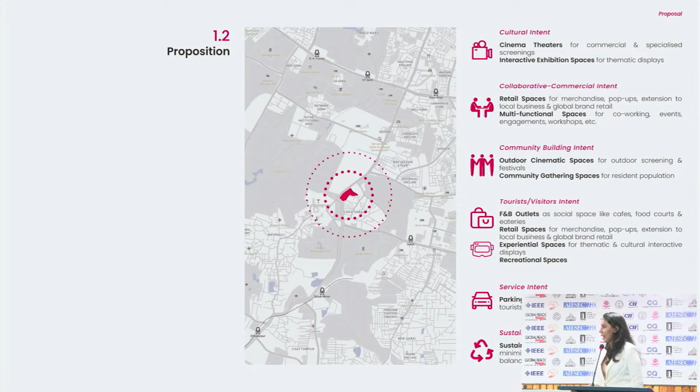The site, as you can see on the map of Delhi, is located in the South Delhi zone, right across the Qutub Minar precinct. The project proposition intends to achieve certain cultural, collaborative, and community-driven spaces which can bring people back into a holistic environment rather than have them segregated into their own personal zones, bringing people together for that culturally important tool.

Coming to the users, the user groups were derived based on interest, age, and the context of the site. Because of the cinematic quality of this project, it is something beyond age restrictions, something every age group, community, or person with a different interest may be able to enjoy. Based on context and demographic studies, there are a lot of generic public, students, working professionals, and industry-related professionals in the context of the site and in Delhi in general.

The program components for this project were to include auditoriums and premium auditoriums which could hold film screenings as a direct medium, but also specialized screenings or interactive exhibits around the cinematic industry, and exploration galleries where various exhibit processes can be brought to students or individuals who want to learn more about Indian or international cinema.

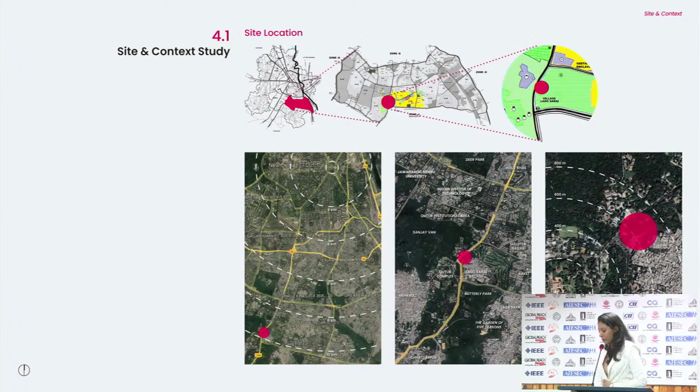The site, in Lado Sarai, is a 7.86 acre site, approximately 31,800 square meters, located about 10 kilometers from central Delhi. These are some of the landmarks understood to gauge the demographic or user groups that will access the site daily, and why this site becomes relevant or prominent for such a project.

The site is right across the Qutub Minar precinct, and the entire Mehrauli Archaeological Park and rest of the historical monuments make it relevant because they experience daily tourist and visitor footfall. Even modern cultural landmarks within a 3-kilometer radius are relevant because they are famous among different user groups, which could impact the footfall experienced on the site.

Institutional landmarks also have relevance because with the increasing knowledge about media studies, cinematic studies, arts and culture being taught in various institutions, youngsters or curious minds could access the site to gain more knowledge about cinema and not feel secluded. Delhi has not experienced such an entertainment hub in totality.

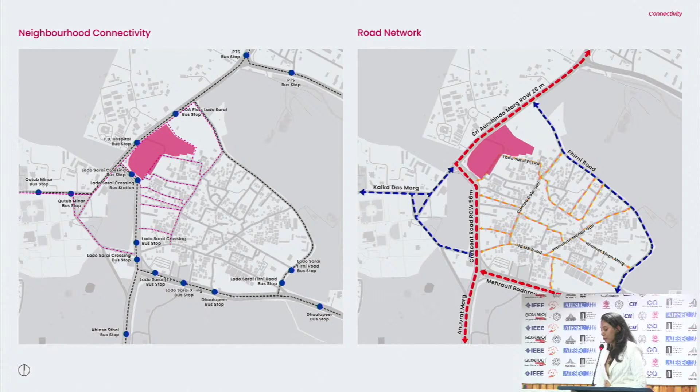So these mark the various connectivity and access points, which highlights that the site is very well accessible by public transport, pedestrians, etc. Now onto the design thinking.

The project vision was to create an iconic cinematic icon, an iconic site at a city level, a heritage oasis as a community catalyst at a site level, so that it can cater to the tourists on a daily basis, the people who are living, as well as the people who are living within the vicinity or accessing the site and its surroundings for work.

The major concept driving the site and its design is the visual connectivity and access leading to the Qutub Minar. That drives how the built would respond on the site, and how primarily the open spaces are targeted and the built spaces are considered around it.

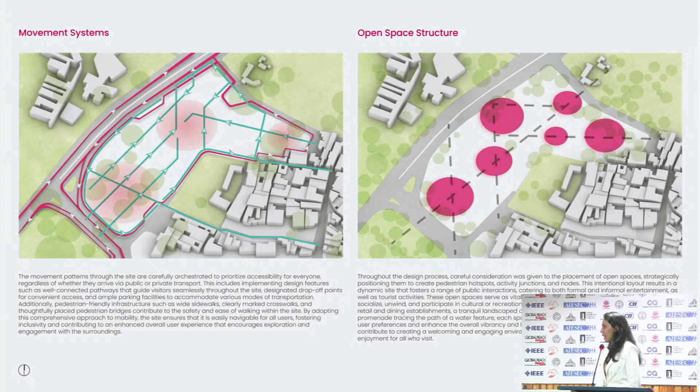These movement spaces and open space structure arrive from various understanding of the traffic movement, site connectivity, accessibility of public and private transport, as well as pedestrians from the neighboring houses. It also aims to have a green integration, considering the contours on the site, as well as the green environment around it, with Sanjay Van and the Qutub Golf Course adjacent to it.

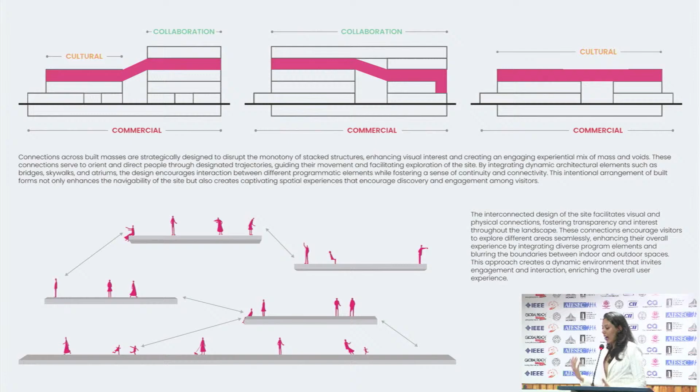The intent, because of the existence of a lot of contours on site, makes it relevant to have multi-level connections, so people are not just restricted to one linear phase or one zone. They're able to access various parts of the site and have an experience of the entire site as a whole.

Now coming back to the multi-story, the fact that it is called multi-story with a Y is because there are various stories, like in a cinema, happening at various levels as well. It's the promenade at the basic urban level, at the site level, which is bringing people in, which is attracting as well as creating public spaces.

The performances where various art forms, screening, cinema-related activities may happen, and the folly, which creates a green and a more sustainable kind of roof environment, also gauging on the views that it offers.

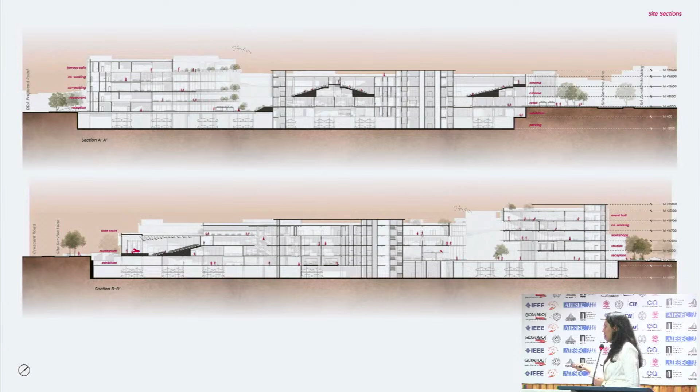Through this, you can see that this is the central promenade, bifurcated at 2 levels. With various programs placed intermixed at various levels, it gauges a direct view or a direct visual vista towards the Qutub Minar.

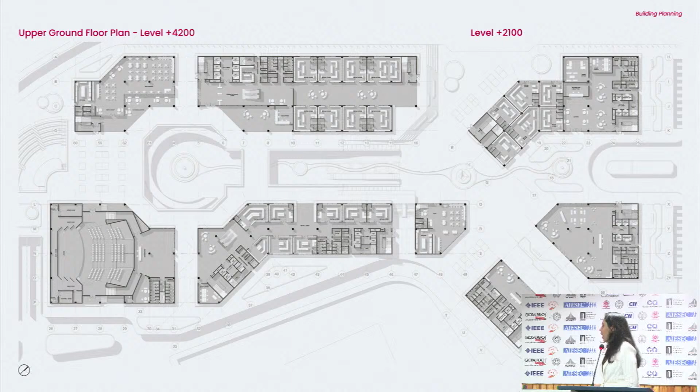These are the various floor plans. The ground floor plan basically is the entire exhibition gallery. The upper ground floor plans, as you see, there are multiple levels extending and moving up and down, which are designed as per the contours of the site, keeping the contours and the natural topography of the site in mind. These are majorly dedicated to commercial spaces.

Then the first floor plan is for the cinematic spaces, and this entire chunk is for office spaces or workplace zones and co-working.

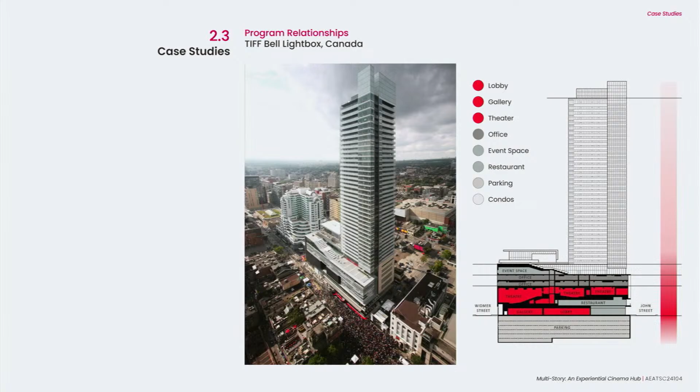So to answer that question, that's why I have created the concept of a promenade at the lower level, so it doesn't necessarily restrict you to interior cinematic spaces. It also brings you out in the open, like the plaza spaces or the open air theater spaces that have been created.

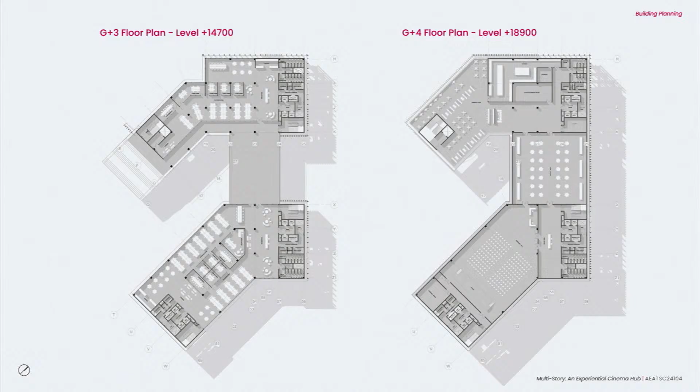So I wasn't actually following what you were saying. Do you have something, or did I miss it out? Yes.

So basically this is the central vista which looks towards the Qutub Minar. The intent of this was also, since Qutub Minar as a historical event has significance with the site, with the context, as well as has had significance with the cinematic history in India also.

It's being used as an iconic tool, an image, or it has an identity always connected with Delhi when it's projected or to gauge audiences. So that is a kind of experience that this promenade also offers while you are in the space, whichever space you may be able to enter from.

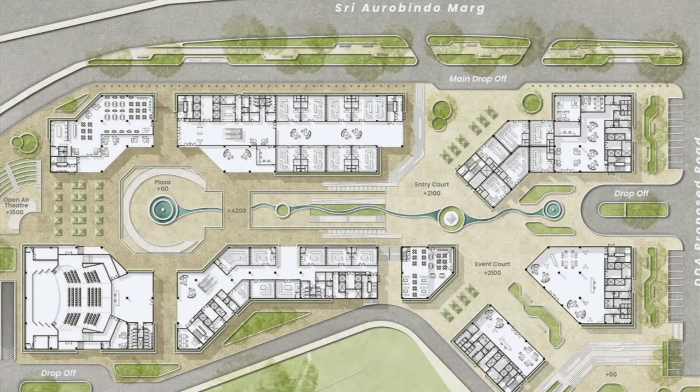If you're getting dropped off, if you're accessing the site as a regular working individual, or here to learn about experiences, or just to experience various art forms taking place in different public zones, this basically blurs the boundaries. It does not have strict limits to allow one person and not another. It creates a central space where every kind of community member is able to access, as well as gauge the kind of experience that this promenade has to offer between the built structure, focusing on, you can see it, and I can actually access that auditorium.

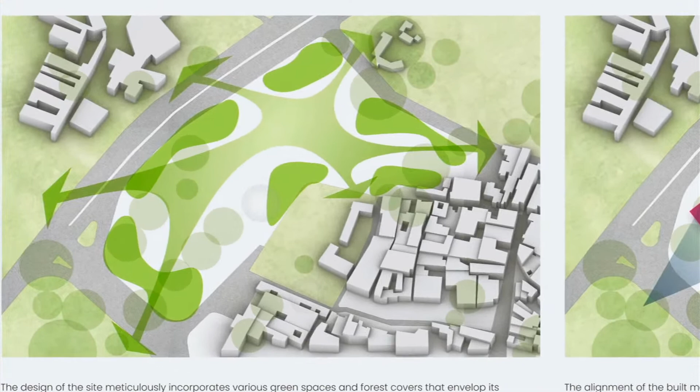Basically, this has fine lines which highlight the contours, but maybe because of the lighting, it's not properly visible, which is why I had demarcated on the site plan which are the level differences taking place. Okay, fine, thank you.

Can we come to the site plan? Yes. So your central vista is reminding me of Lutyens' Delhi and not of the Qutub complex.

But anyways, what I want to ask is, considering this as a social concern that you're trying to show here, if I'm looking at this, the Aurobindo Marg, which is a very strong edge, you cannot expect people from across to participate physically also. You're trying to create some views towards the Qutub complex, which I doubt is possible. But anyways, the little gesture you're trying to do in terms of how you're trying to open up that area for the people from Lado Sarai to come and participate - the structure is so alien to them, so intimidating in its character, do you really think people from Lado Sarai will come and play a little part in that community center you've attached there?

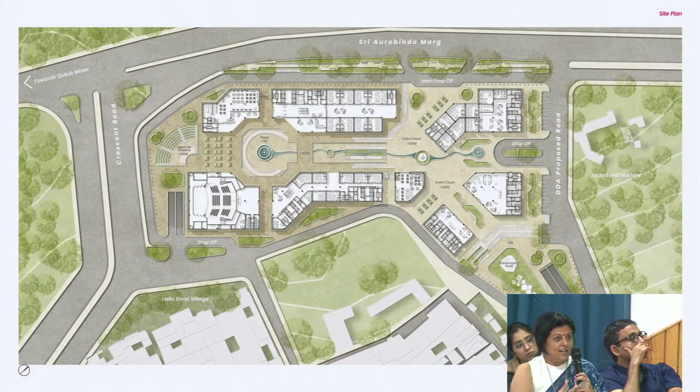And also, why a cinema experience? It's currently an empty DDA land which is not being used, so to revitalize that and give people spaces, because there has been no development on the site for a very long time - it's being used as a dumpster. So to improve the lives of the people living there, they're actually able to use the site and not just have it used as empty land.

Also to generate more productivity and more people to be able to use the site, maybe it be students or industry professionals related to the cinema industry, or generic people who want to learn about cinema - cinematic exhibitions are put up, and those are something that come up very rarely in a Delhi context. People run the art gallery, so in a way, financially it is helping them. But again, this question - even if you have these professionals or experts of cinema coming here, how is it helping the people around, meaning the people staying in Lado Sarai or across the road in Mehrauli? So definitely to generate more revenue or more productivity on a site which is right now a total dumpster.

That's why I started with cinema as a tool, because cinema halls, even though having lost a little bit of significance, are growing back - that is what the consensus also says. So this is something that people of all age groups, all interest backgrounds would like to access. If it was just only a singular gallery or something like that, which is only of interest to a very small group of people, versus cinema, which was taken up to be able to gauge the interest of more people from various backgrounds - even people accessing the site as workers, or who have offices, or who've just come for commercial or merchandise related experiences - they're also able to interact with the facade, the site level public spaces, and be a part of the public arena.

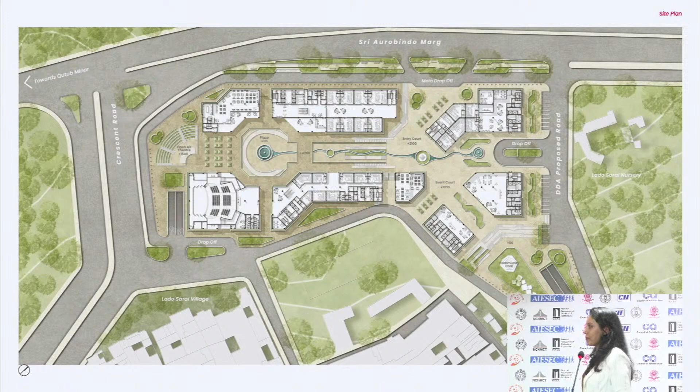I wanted to commend you on your narrative, the way you put your presentation together. But I also have to pull you up on the fact that when you attend a seminar like this, you should have done your homework and ensured that you cram it into 15 minutes. Yes. All right, all the good work went to waste, right?

Having said that, at least from two sides of the road, there is no distinctive entry point. And I think if you had done that, your idea of keeping this as an open access would have sufficed. Right now, I see this as a ubiquitous design, which means everything everywhere, right?

So it's a limitation. The second thing I wanted to indicate here - you talked about it as a promenade, right? I don't think you have got the word promenade right for this, because go to your section, please, of that particular promenade area, and it is not a promenade.

Look at the height of the buildings on either adjoining sides. It is more like a court, a central court, and not a promenade. So if you wanted to create a promenade, it would have meant that you needed to work on the idea of stepping out your section, ensuring that the visibility of a promenade is more defined. It would have made a lot more sense if you had a promenade going there.

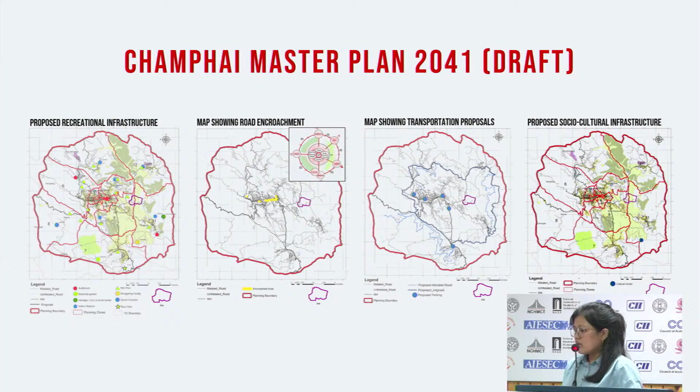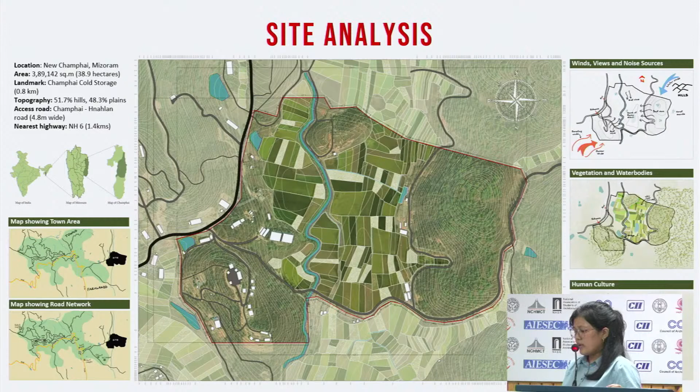hills and 50 plains. And towards the east and the west, we have two hills, and then there is a wet rice cultivation flowing in between where construction is not allowed.

And for my site zoning, I have divided the site into 3 zones according to culture. The east side being the Chin area, and the west side the Zo, and towards the north the Kuki people, which I have said before as the geographical location for my concept.

And then they will each have 3 cultural towers, which we will see later, and it will also be pedestrian friendly and cycling friendly. And towards the right we can see the contour maps.

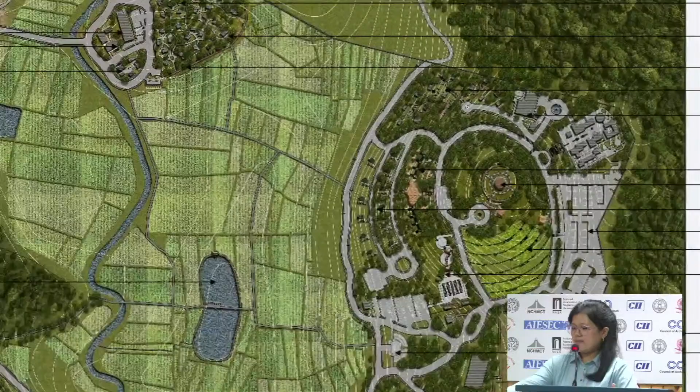So this is what the site plan would be looking like. I have taken the evolution map that we have seen before as a development for my site plan, where it will be starting with this area, and here there will be the from the Chiang people, how they came into Mizoram. So here there will be the Chin people coming down.

And then the houses will be there, Chin houses, and Chin tourist village will be there, and Oak Tasar plantation, and here, this will be where they start their evolution from, and they will move further down here, and then the weavers will be here, as we have said in the map before, and there will be the river, the border river that flows in between.

And after they cross that is the Zo area here. And the Kuki area, the Manipur area, will be here, where they have mainly bamboo construction and bamboo firms there.

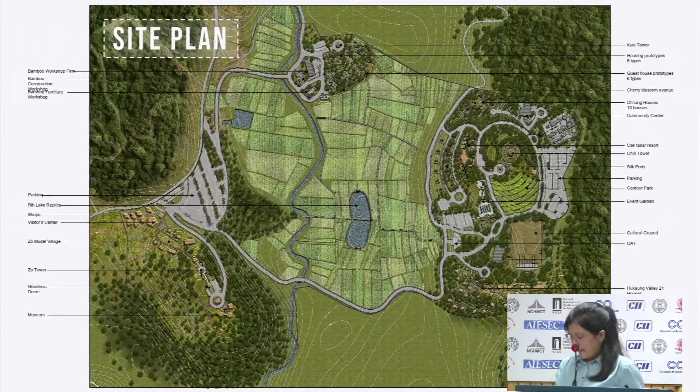So first, let's talk about the Chin Tower, which will be in the Myanmar area. It has structural supports like threads, and inside that holds up the tower, and the staircase like a strap woven around it. I also placed it in Myanmar area to indicate the birthplace of weaving culture.

And we can also see the 4 colors of the walkways, which I have taken as reference from the natural dyes like indigo, turmeric, and all. The second one is the Kuki Tower, which will be giving tribute to the art of craftsmanship and artistry, and it's also to denote the shared heritage in Kabaw Valley with our ancestors.

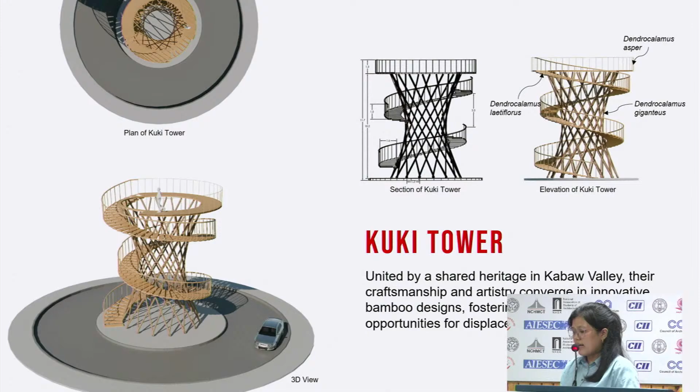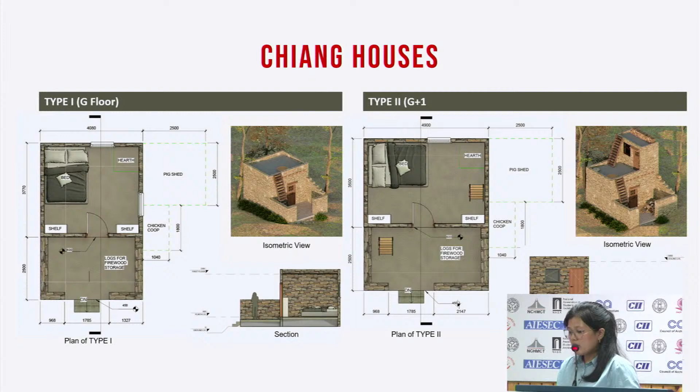So this is the Chin area. The first, the Chiang houses where the first ancestors were living, which is made of stone. And this is the Chiang tourist village, which is mainly a recreational area, and its areas will be used. This is the silk pod stay.

There are two reasons why I called it Silk Pod Stay. One is the revival in textile production, and another is because the Oak Tasar plantation is there. The frames will be made of CLT wood, and the membranes inside will be made of ferrocement or some pneumatic inflatable structures. The site showcases woven fabrics, textiles, furniture, all displayed inside.

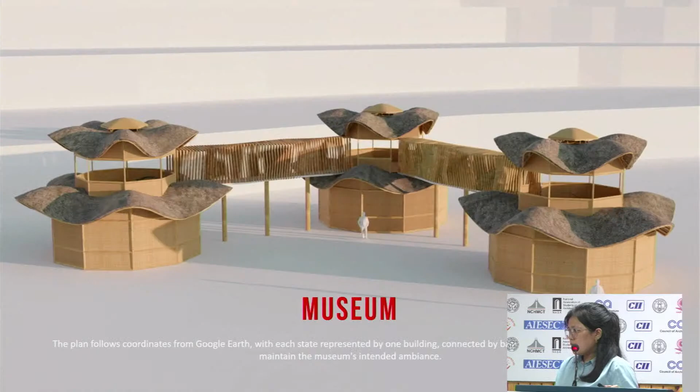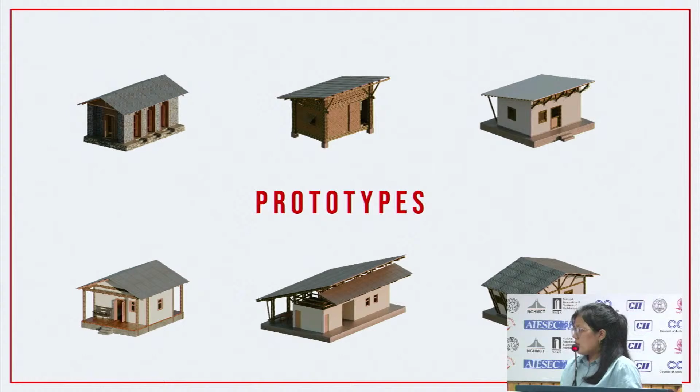I have also created prototypes because recently we faced the cyclone Remal, which cost us about 30 lives in our place, and also the collapse of around hundreds of houses. So this is the reason why I have come up with the housing.

Prototype 1 is a stone-filled gabion wall house, where the walls will be made of gabion stones to resist lateral pressures. At daytime it will be used as a bamboo craft center, and at night it will be for family housing.

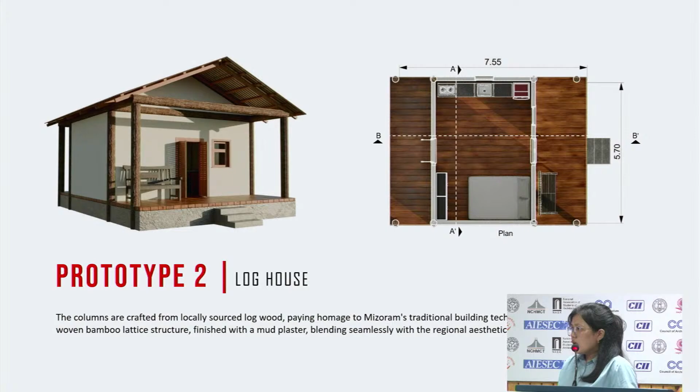Also, the roof will be of Tetra Pak roofing, made of aluminum foil and recycled polyethylene. Number 2 is a log house, the traditional one we have in our place. The columns will be made of oak, teak, and sal, and the rafters will also be made of wood.

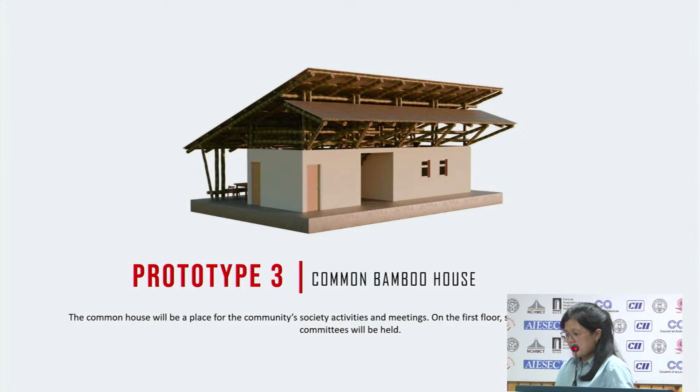This one is the common bamboo house where the local village head or the regional head will be staying, and the upper floors are divided into two. The right side is used for crafting and the left side will be used for drying.

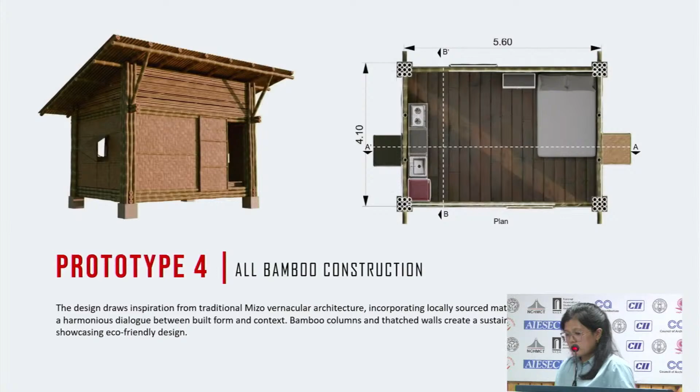Number 4 is an all bamboo construction. The only thing I have changed here, since it's a cultural thing we have, is that I have used a greater number of columns. So this will be the elevation sections.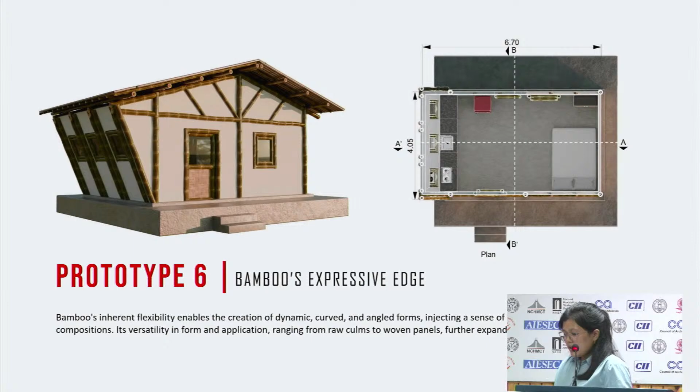And this is the last one, bamboo's expressive edge. I have made this to show how bamboo can be used in our place, which is an earthquake-prone area, and also to reduce the floor space and increase the utility of the space vertically. And that's it. Thank you.

Congratulations. So what I wanted to ask is, our vernacular architecture, in its essence, is very sensitive to the climate, to the material, to the construction technology. And that has evolved over a period of time.

That's missing, sir. You're not very clear about telling us whether it is just that one independent site or are you handling it over 3 sites?

Sir, the reason I chose this site is because I wanted a river flowing in between, so that made my site bigger than originally planned. I've indicated here where the towers will be placed, the red ones, and where each.

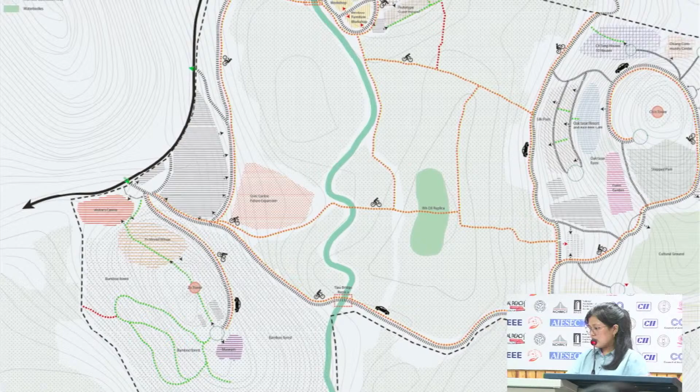From here we can see how the cultural spatial division will be, and how the communities will be taking care of the business models and existing vegetation strategies. From the hydrology map and slope analysis map, I placed the blocks inside. My project was quite big, so I was trying to cram it into 15 minutes, otherwise I would have more time to explain.

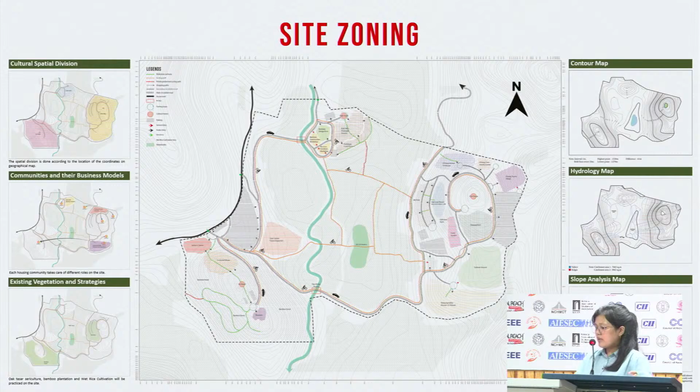If you look at the museum circulation, we can see it from this section, and this is the floor plans. There won't be physical, tangible models, but there will be writings and art galleries, objects like that sitting on the floor won't be placed there.

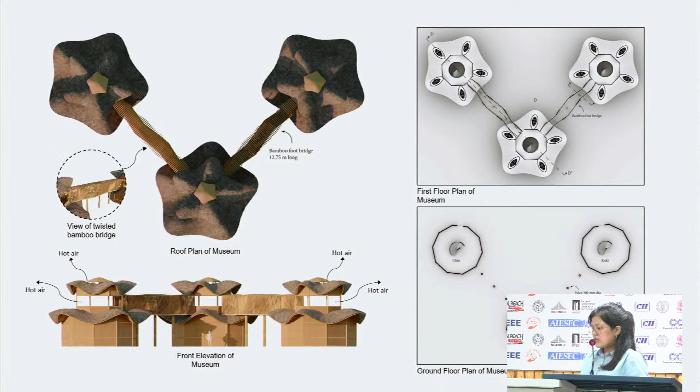Congratulations for making it here. Thank you, ma'am.

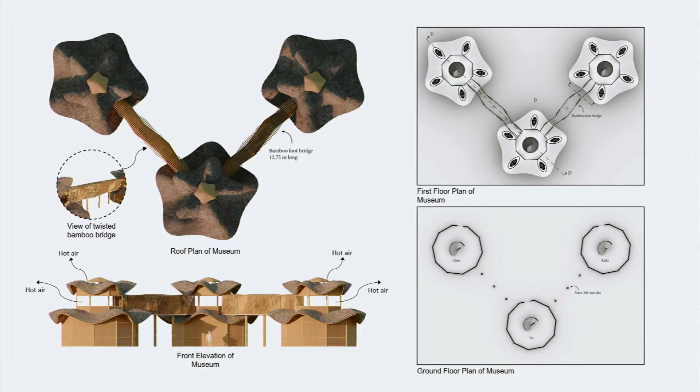So my question is, we are talking about employment as well, right? I think there were two things you were trying to say. One is loom and weaving, the other is farming.

So in the design, I am not able to see where these spaces are. If we are doing loom, there is probably a certain process to it, right? So these processes.

Ma'am, usually in this site there's a water body where fishes are kept. There is a wet rice cultivation where this fish-rice-duck integrated system is going on, and there is azolla farming also. It's totally natural, with no use of fertilizers.

The fishes, I forgot the word, aerate or something, give oxygen to the rice cultivation. So the farmers cultivate ducks and fishes to take care of the farmlands also. In our culture we don't usually have cattle farming or anything like that.

And for the weaving, ma'am, where do you accommodate that process? Ma'am, this area, the Hukaung Valley, 21 houses will be for the weaving.

In our culture, almost all the women in each family were historically experienced in weaving. So in each house there is a balcony that rises up, and there they had their weaving looms. That is where they place it.

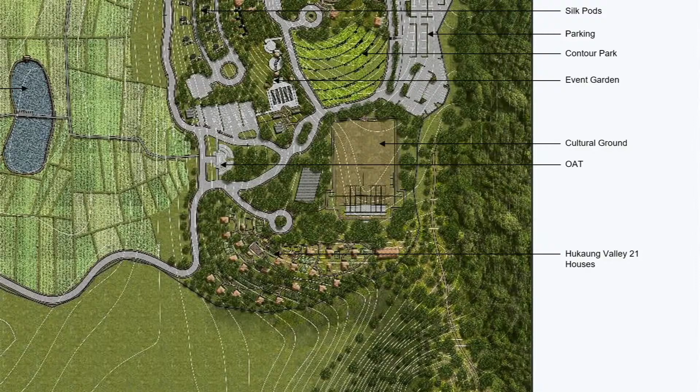But ma'am, unfortunately I couldn't keep the drawing, it's in my AutoCAD version, I didn't render it in this one. So, okay, thank you, ma'am.

Thank you. Thank you.

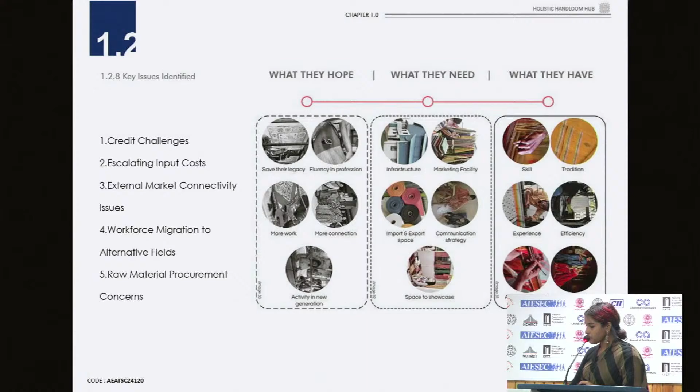What are the aims and objectives? My project has 3 E's: environment, equity and economy. It aims to target these 3 E's. My aim is to create a single hub for the weavers in Shantipur with multiple objectives, including preventing exploitation, generating employment and connecting with the fashion industry by promoting collaboration amongst locals, government officials, visitors and other stakeholders.

The scope includes connectivity, and important parts like different dyeing maths around the site, and the Hooghly River village. I studied how the dyeing is done and how the squares are formed organically. My site, being a very important aspect in the rural setting, plays a very important role.

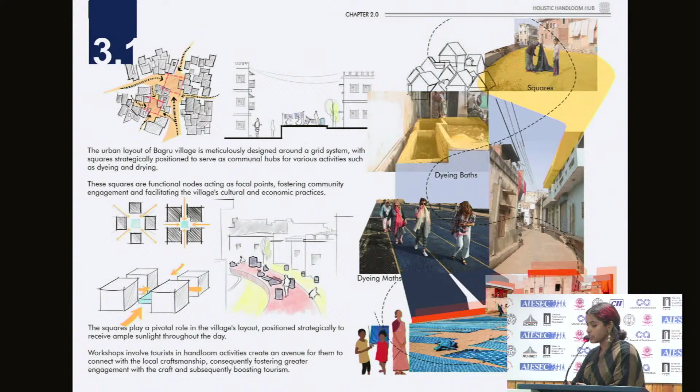That's why I studied Bagru. And here, I have studied the networking of the entire site plan, how it's done, how the natural spaces are integrated.

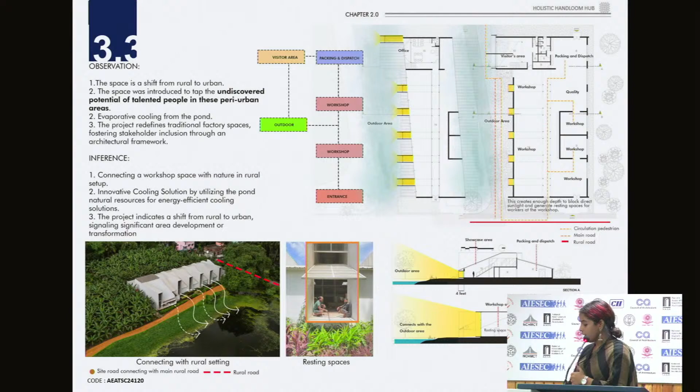This case study is very small, but it plays an important role because the workshop spaces are connected in a very unique way with the rural setting. My site also gives a similar vibe. So studying this helped me understand how the undiscovered potential of talented people in this peri-urban area can be utilized through natural openings.

It's connected with the Sealdah junction in West Bengal, the Shantipur junction, and then to the Motigaj More. I'll go through the site study since we have a little time. In this landform area, there's a slope running to the southern part, and a lot of water bodies and vegetation around my site. I've identified all the plants, and my design aims to keep the vegetation of that area intact.

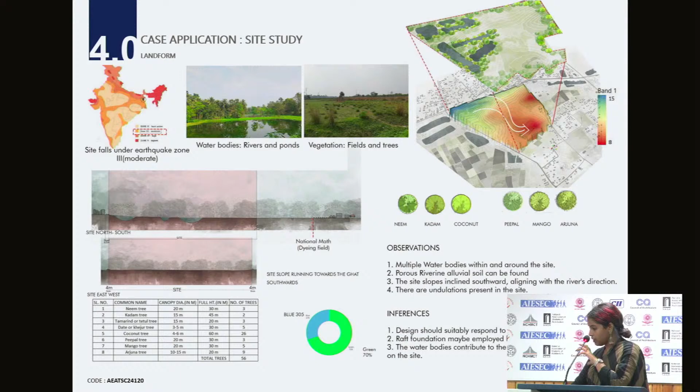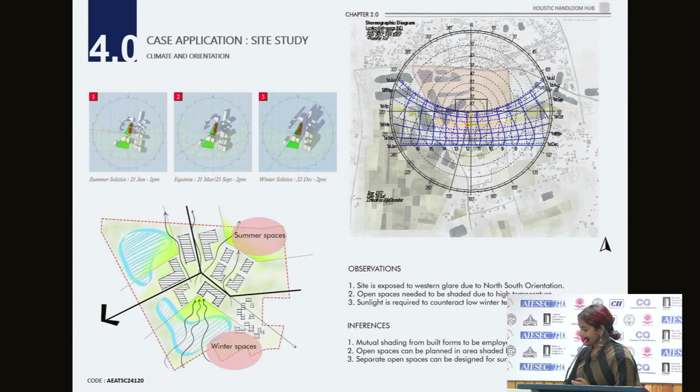So mutual shading from the built form can be employed to reduce glare. This is the urban pattern, the granular pattern of the site around there. The lower strip shows the neighborhood area of the site, which has a very vibrant character with a rural setting.

The first photo shows the present condition of the site at Shantipur, and then I have connected it. I've taken the two major axes, the diagonal axis and the north-south axis. I haven't changed any character of the site, and I've tried to orient my built form accordingly.

So I've integrated nature with community and tried to highlight Shantipur's handloom tradition by connecting a roof structure. My site also shows the handlooms through a central axis which celebrates the weaver, and it has major points where it weaves with the nature.

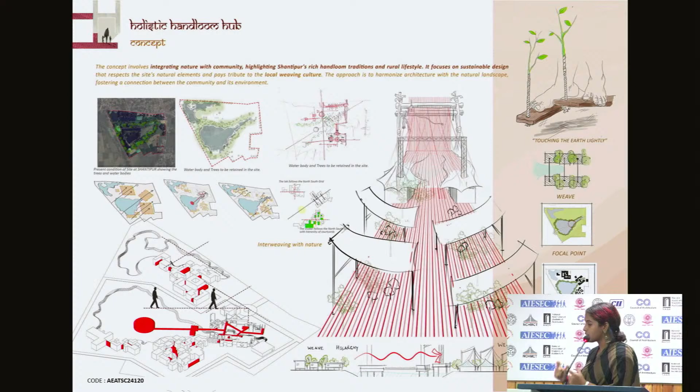It has a major focal point where the two axes meet, a hierarchy of spaces, and also a framing of vistas done in the site. These are the primary development sketches I went through for understanding how to integrate the handloom and the sari within the built form of my project.

The site zonation mainly consists of four important blocks. One is the lab, in the upper portion, the lab and the library. Then there's the central axis which connects with the ramp to the water body, and it celebrates the weaver community, with the exhibition space, the experiential center, and the workshop areas.

Then comes the cluster block. It was initially thought of as a module which can be implemented later to the weaver villages, and they can relate to the cluster block, with that module implemented later to the different weaver villages around. Then there's a dyeing block along the water body, as water is a very essential part of the dyeing unit. So I've tried to connect the dyeing block with the water body that was already present.

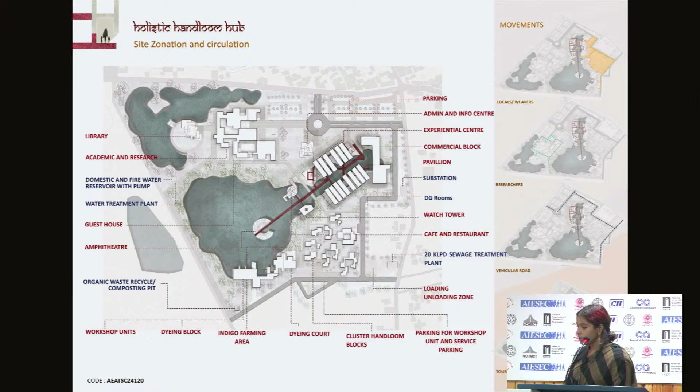So this is the site plan. The initial stretch of the block, the commercial block, that is the diagonal block, is connected with the admin. This is the entrance, this is the admin, and over here is the private space, this is the lab, which only people can go and explore if they want to see how the dyeing, how the research is done. This is the admin, this is the commercial block.

Over here is the gallery, the experiential center, and the office spaces below, and it connects with the workshop areas. This creates a visual connection and a horizontal connection. So when a tourist or any person comes, to make them interested in the entire process of handloom, I've tried to create a journey through this entire block.

And then it connects with a ramp to the amphitheater, where fashion shows can take place, creating a very important fashion show venue.

So designers can go and do their fashion shows over there. And then this is the cluster part of the block, which is connected towards the weavers village, already there in this part of the site. And then there's a dyeing block over here, so people can come and experience the entire dyeing process also, through exhibitions and all.

In this block I would like to explain in detail. So this is the exhibition and gallery part. I have tried to follow the hierarchy of spaces through the courtyard spaces over here. And this is for the lab block, because it's very important for natural light and natural air to come in while the entire experiments are done.

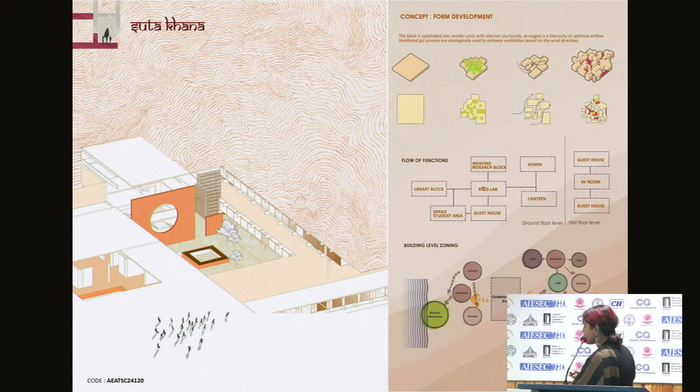And here I have tried to create a very rural kind of architectural style with jalis over there for ventilation, so that it connects with the people working over there. This is the lab block render, and this is how the entire space will be inside the lab block.

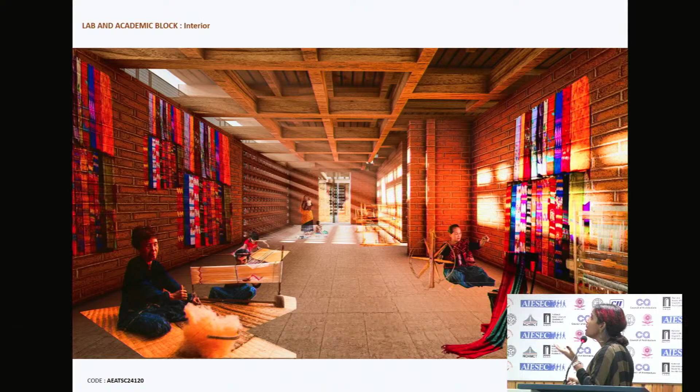I wanted the light to come in, because as I had a talk with them, they said they don't want something marvelous, an out of the world architecture building. They want something they can relate to. So my entire idea was to make buildings which architecturally uphold the space, but yet give that essence of rural setting.

So this is the basic render of the dyeing block.

It has taken shape. Can we go to the master plan, please? So this is...

I have to appreciate the grand narrative you went through, because it covered most of the ideas that went into the project. Having said that, some of your drawings are not very clear. For example, the site plan itself is not very clear, doesn't indicate which parts are built versus what is open. Can we go to a much clearer plan which indicates some parts of your project?

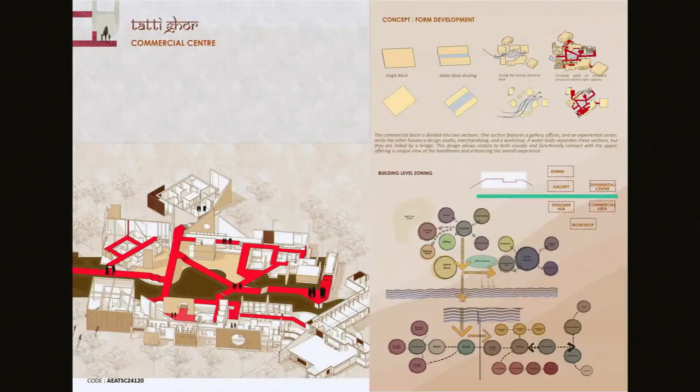So let's leave it at this. The idea is that your work...

The rural character of that space creates a unique identity, but still it's rural, and a weaver can connect with it. I have done a survey with the weavers on all their points, like the amount of light they need, where they need it, and how they need it. I went through that, and accordingly designed the cluster blocks and lab blocks. The main focus of my project is this diagonal axis I have been talking about, which celebrates the weaver community. They will be walking in places comfortable to them, but yet look up to something that inspires them. So this axis plays a very important role in inspiring the weavers, as it celebrates the community.

You've not answered my question. My question is how vernacular have you gone through? Have you built out of RCC, steel and aluminium?

No, I have just... so let's answer that question. Yes, so answer the question, exactly.

I have worked on exposed brick patterns, and I haven't used RCC columns. For the modular structure also, I have used bamboo stilts and bamboo structures.

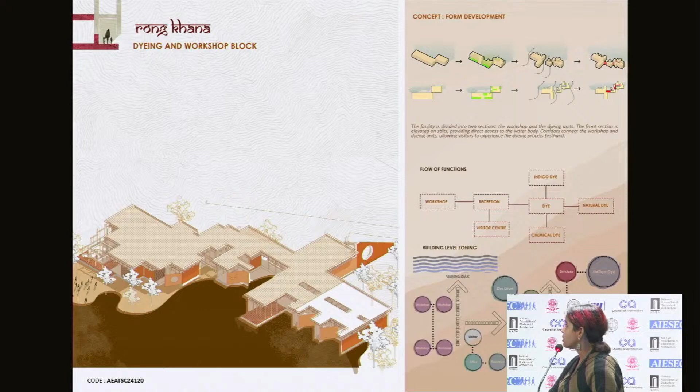Okay, I can go through the modular structure. The jalis and all I have used over here.

So this is one of the modules I have worked on, and it has a timber beam and column structure with stilted bamboo strips for ventilation.

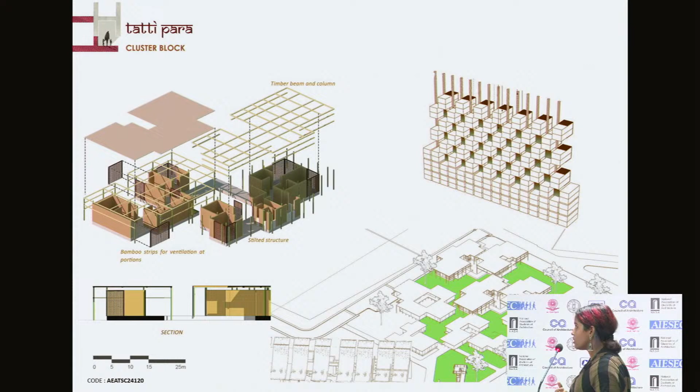I wanted to create a modular structure which connects with the neighbors. Thanks.

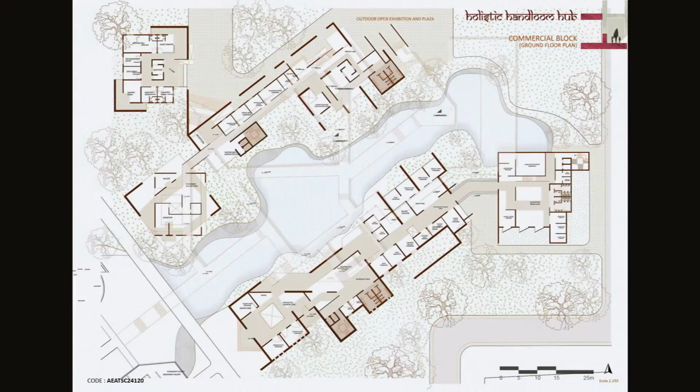Congratulations. Thank you. My question is that this making of fabric would go through various stages and various processes. Yes, ma'am. And probably each process would need to be placed accordingly, and the amount of rain that is there. So how do you justify that?

Yes ma'am, so only this portion of the building has an open structure. In part of it there are galleries and all, but I have kept a light kind of jali in the roof structure, and over there I have overlaid the clothing kind of framed structures.

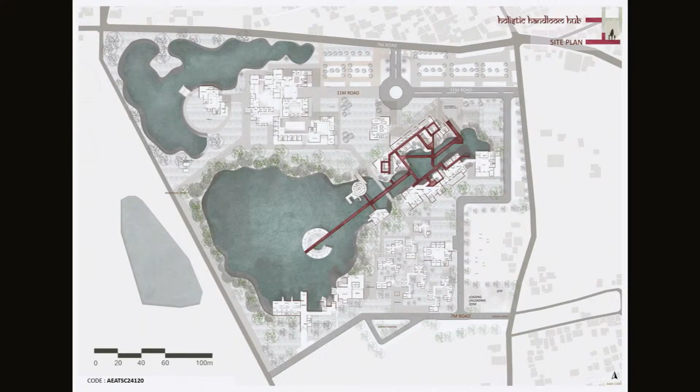The entire thought was to connect the clothes, and so that different... yes ma'am, three have a different size of footprints. Yes ma'am, the articulation is different.

Even the scale is different, right? So it doesn't appear to me, if I'm looking at it, as one entire whole. So my question is, why do you need this, and when you're breaking it, if there is a change, there has to be some kind of connectivity.

An element that defines that change, which is not there. So I see a very loose-ended approach. Yes ma'am, they can go to that area. So even if they are supposed to go to that area, what I'm trying to say is that 1, 2, and 3, they need to connect somewhere or some place.

Ma'am, architecturally, through the identity of the space altogether, I would say that yes, somewhere it's connected because of the materials, the exposed brick, the open planning and jalis, and the stilted bamboo material that I've used. Overall, if I view the place in that way, it's connected. Thank you.

The last presentation of the day is AEATSC 24103, Urban and Cultural Hub at Sabarmati, Ahmedabad.

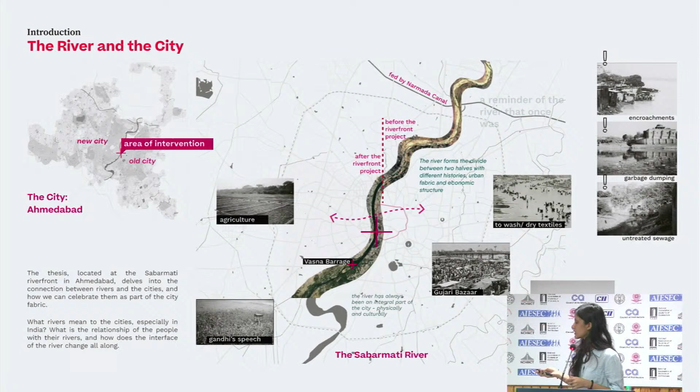So my site is located right in the center, like the heart of the city, on the juncture of the river, the old city, and the new city on the other side of the river. Ahmedabad as a city was established around 600 years ago, and it's divided by the Sabarmati river, which is a monsoon-fed river.

In recent times, the riverfront opened around 2012, the first of India's riverfront development initiatives. So the site, at the center of the city and at the riverfront, holds huge potential to unlock those lost charms from the old city and to revive the urban environment.

As a starting point, I delved into studying how the river was and what it actually meant to the city, and how it transformed from washing clothes at the ghats, to holding circuses, to having a 600-year-old Gujari Bazaar that happens to be right at the place when the river was dried up, taking place at the flood plains, which is reclaimed land.

I identified various issues that happened due to it being the first kind of project in India, to understand how urban rivers could be treated and how we could propose a way to reconnect the rivers back to the cities.

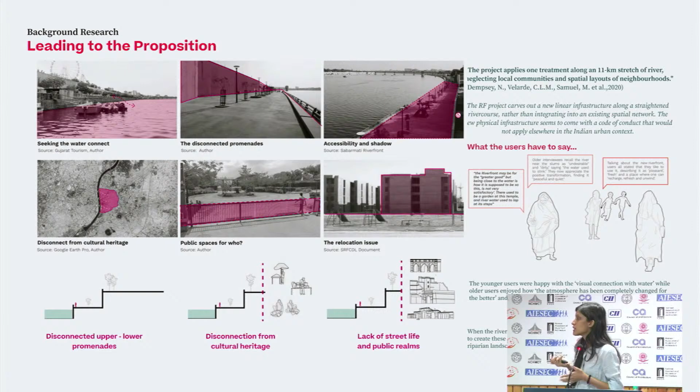The problem being that people are seeking the water connect, the disconnected upper and lower promenades, the disconnection from cultural heritage. So these were the pointers represented in this scheme.

So my approach involved the big scale, the informal and the formal, which allows the smallest units and the least powerful workers to operate alongside the largest units and the most powerful economic players. This was the kind of approach that I focused on.

I had a few case studies since the site's program was to be a cultural center, so I researched exhibition and cultural centers.

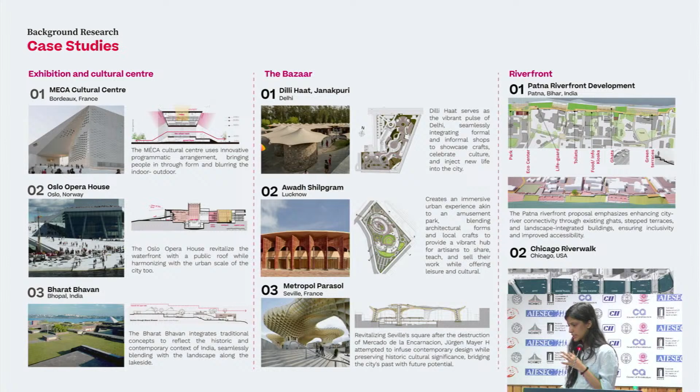The bazaar is a very important aspect of the project because of the presence of Gujari Bazaar right in the vicinity, and the riverfront's highlighted area is the newly allocated area for the Gujari Bazaar that used to happen across the river. So it is placed right here, opposite to the site, across.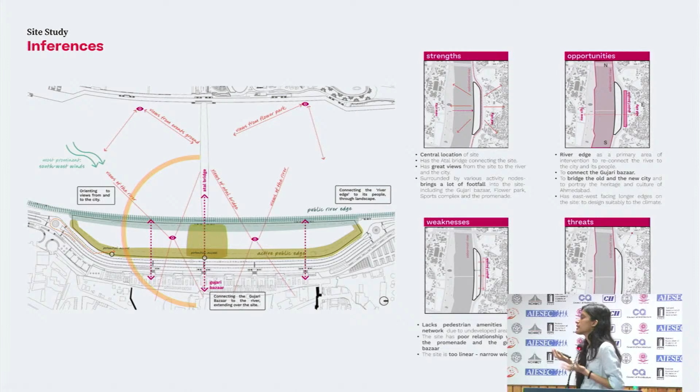So my intent, through the site study, the research, and the context study, was a few pointers: as I said earlier, to establish a connection between the old city and the new city through this pathway, to bring the bazaar to the riverfront, and to activate the riverfront to be full of the representation of the public life of Ahmedabad, showing local art, various artists' exhibits, outdoor exhibitions, open-air theatres, the riverfront plaza, food courts and workshops.

So this was the further program analysis.

And the design determinants were bringing the city closer to the water, activating the site using green spaces and public life, and creating the people, and that itself is the exhibit.

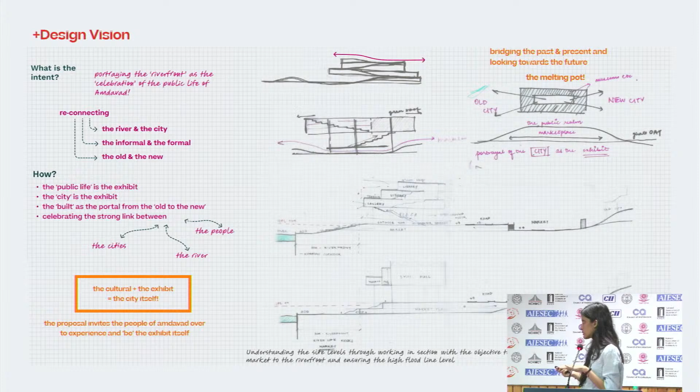So these are a few concept sketches where there's a play of levels to interact with the river, as well as the built-up relationship, and to bring the Gujari Bazaar here, which is at the riverfront level, at a +7 level, considering the river to be at 0-0 because of the high flood line level, which has only occurred twice.

So the concept revolves around making an urban traverse along the riverfront, where the city's rich cultural and historical traverse unfolds, and while the ground floor stands vacated, the built form rises up, and the whole of the promenade is for the public to flow.

So this is the site.

So I created an urban park over here, considering how active the riverfront becomes in the mornings, with people jogging, exercising, and catering to those needs of the users. Where the original promenade was only 10 meters, I extended it and made steps for people to sit on, watch the sunset, and made it into an urban park here.

The built form is only in the central area, with the bazaar below it. It will show more clearly in the sections. Then there's an event place, because of how vibrant the festivals of Gujarat lead you into the market. Finally you experience a clear passage and a plaza below, while there's an above-ground plaza which also connects to the greens on either side.

As soon as you enter, you see a bustling place where there is a market underneath, a bridge in front, the river at the front, arranged around the courtyard, and there are a few pockets where, like when you are strolling through the art galleries, you see outside. This is planned for it.

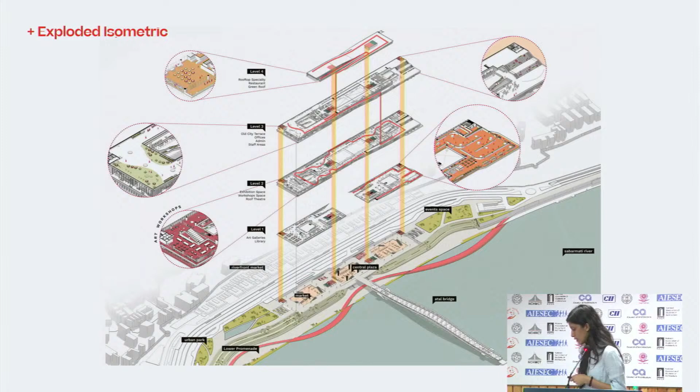This is the site plan. One second, how do I zoom it? Okay, so this is the site plan for you to see more clearly how this is the entry.

This is the entry, and these are the escalators to lead you down and straight, establishing this connectivity. These are the ghats right across the riverfront, and these are the cutouts for the market. And these are ramps which connect the market to the site linearly.

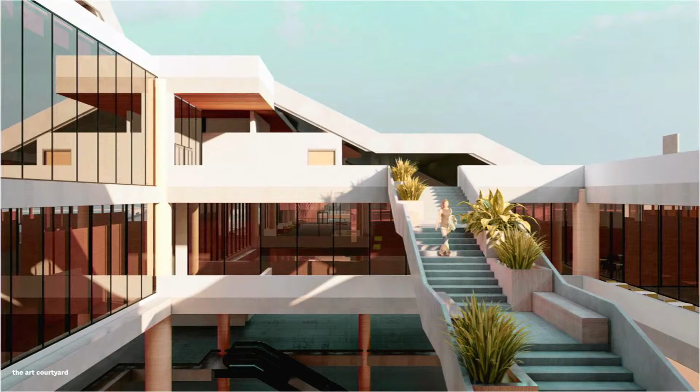Congratulations for making it till here.

My question is, when you say that you would be retaining the old city essence of Ahmedabad, how have you retained it in your design? So the proposition is the use of courtyards, use of traditional materials like wood, and my main narrative would be following an urban traverse, a gully-like experience through the built form, which had various pockets of things that usually happen when we travel through a narrow lane where there are shops. Can you show it in drawings?

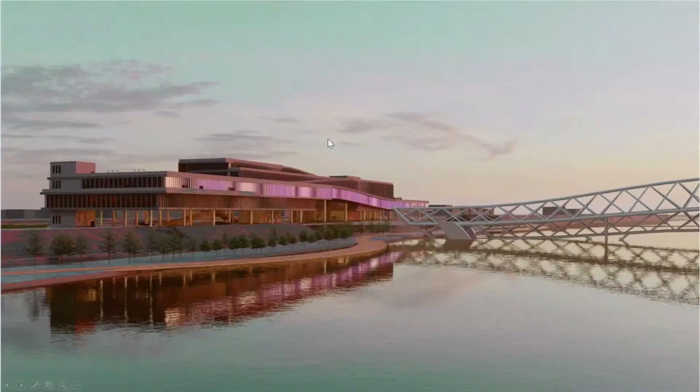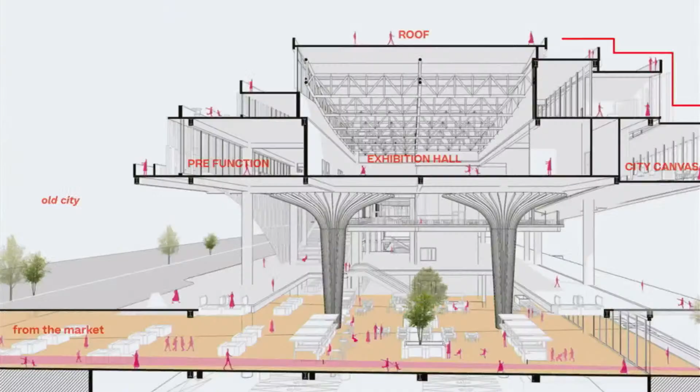So this is the entrance staircase. One second. You cannot see that clearly here, but you can see seating spaces, planters, and activities for people, and this is the ramp area that goes up, and here as well. So these are the lanes, the ramps the people take, and have little things like a gully that you experience.

Okay, so when you're talking about weaving the two things together, sorry, I didn't get you. Have you read how Esther David defines or has written about the process or the transfer? What? I still didn't get whose research.

So when you're saying weaving the two different times together, how does Esther David define the transformation? No, so my research basically delved into Indian literature more. I read through Rahul Mehrotra's works, Ananya Roy's works, and more of how they apply. So I must have missed that one. Okay.

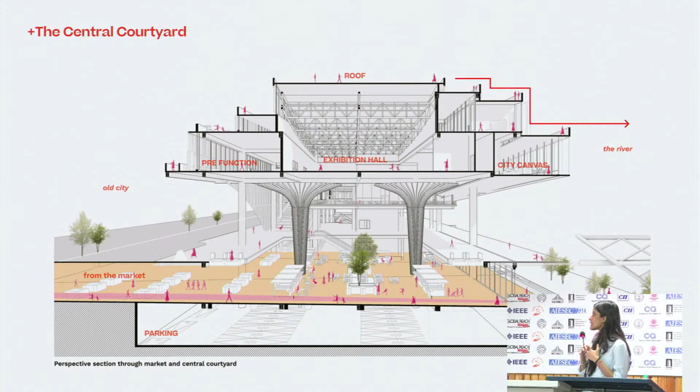Just a curious question, because you picked up one side of the river, as there are two sides, one new and one old. So you picked one. If you had designed it for the other side, what would be your considerations, different from the ones you have now? A very good question. A very good strength for my side was the Gujari Bazaar and my attempt to bring it through, and that was my duty in choosing this side. But if it had been on the opposite side, one second, I'll show.

On this side, so it has a full institutional area. That right settlement has got a certain character, and that is how you begin with saying that the development on the other side and the development on this side - so this side has to respond to the culture of the people on this side.

Now, if I'm looking at your design, so two or three things - the character, the scale of that project does not in any way relate to the older settlement in its scale.

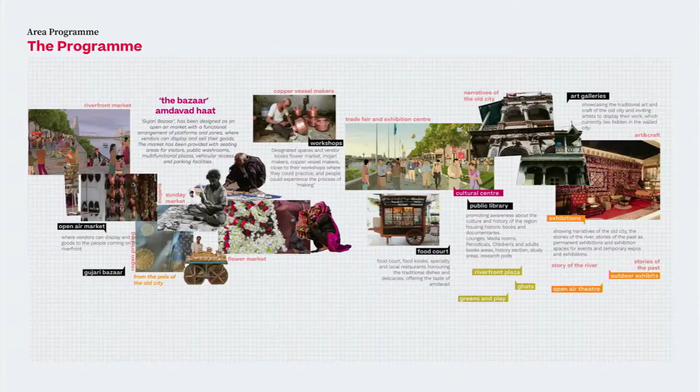The second is, if we look at the older settlement, usually in the older part of cities, where people met each other, there would be a platform, a tree, a temple, and people would interact there. While in the newer developments you have these crossings where you just quickly cross away and move out.

Now if I'm having the Atal Bridge there, which is a pedestrian walkway, and then you showed one access that goes to the older part of the city - that is the chowk that we usually see in older parts of cities, which becomes the hub of people coming together and interacting at that spot.

Definitely, I thought that was grossly overlooked - the scale, even the volumes, the massing - one big block tended to do it.

Just a few things - thank you for indicating this is the Atal Bridge that comes here. So here, creating a sunken sort of plaza invites people to stop over - that was my intent - invites people to meet over and stop over and then kind of merge together, so it's not just being segregated.

I also said that when this chowk comes together, there's a platform, a temple - so there are activities that hold people, right? You need to have some kind of activity that holds people. Here I thought retail and eateries would pull people because there's something to do, so that was my intent for this.

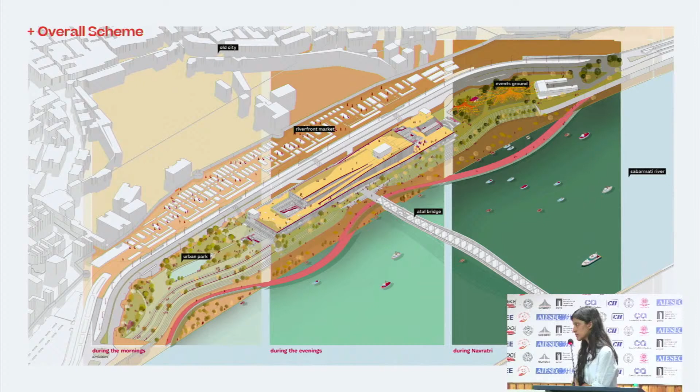Yeah, so that is what my concern is - then it doesn't become for them, it is for people from outside who will come and enjoy. I'm not denying that, I'm asking if it is for the linear way where the riverfront is accessible, but it does not limit to that.

The ramp all through the build also has access to all of it - it's not just the underground area. So the function kind of happens all above, but I respect your point.

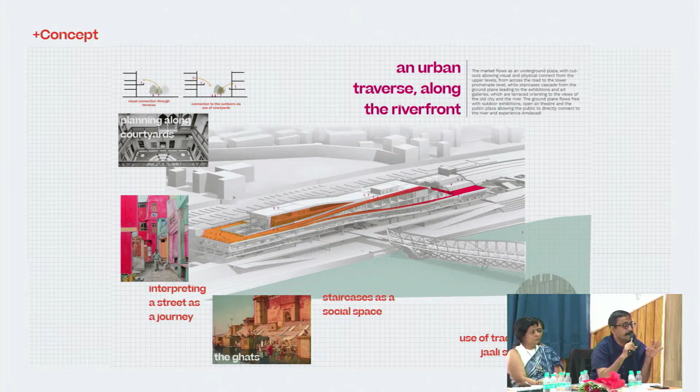Okay, so we understand that the fabric of the city on the other side is much different from the fabric of the old city. It was much easier to do the riverfront development because it responds to the fabric on the other side, and the permeability allows for it to happen. This is much more complex because of what happens behind it.

As much as I would like to reflect on what they have indicated, I thought the one thing that stands out is the size of this project - it is a huge structure, because of its volumes it's very large. I think if you had been a little more sensitive to understand, it would have pegged itself much better - the historic reference is missing, contextually it's missing.

Now, you have it - I think it would have pegged itself much better. Yeah, all right, thank you so much.

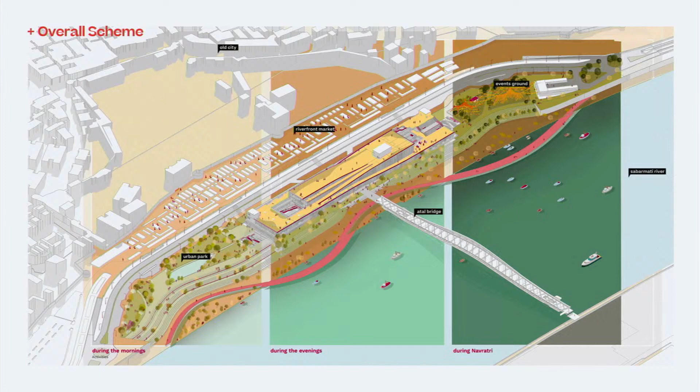Wonderful, it was a very long and exciting day to hear all the people and their thoughts. We now come to the close of all the presentations.